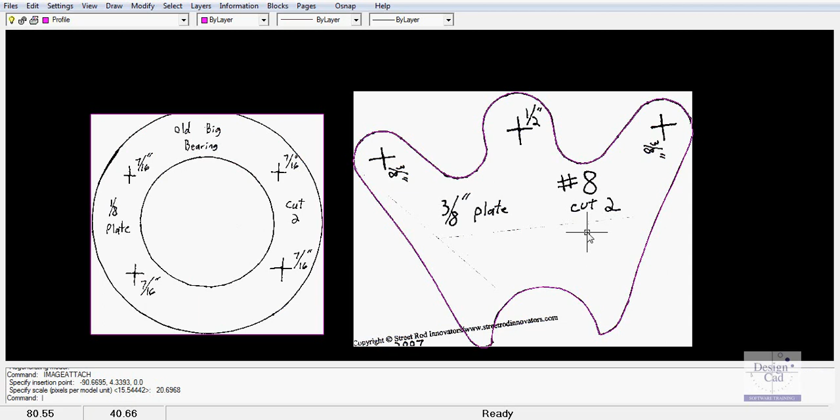You may well want to use the ability of DesignCAD to export DXF files. These could be passed to a laser cutter or a flame cutter, and you might well have some scanned images of the sorts of shapes that you want to draw. The one on the right is quite a complex shape.

What I've done is use the polyline command to trace over the scanned profile there. So if I click on that magenta line, you can see individual little dots as I've traced around the thing.

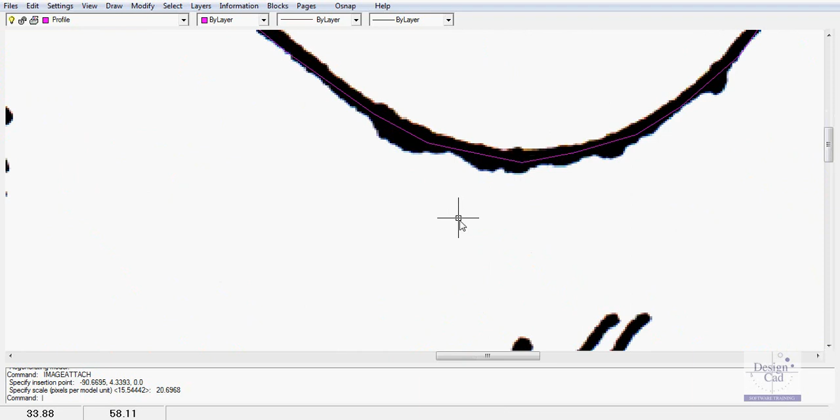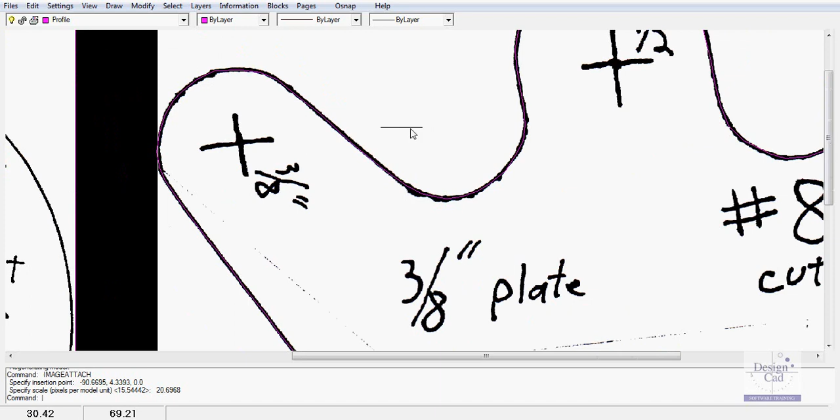You could fine-tune it by just tweaking things, picking on a grip and moving things around. If I put the profile on a layer called Profile, and the image I've been tracing is on layer 0, I can go to Layers and Layer Order, turn off layer 0, and close that little box.

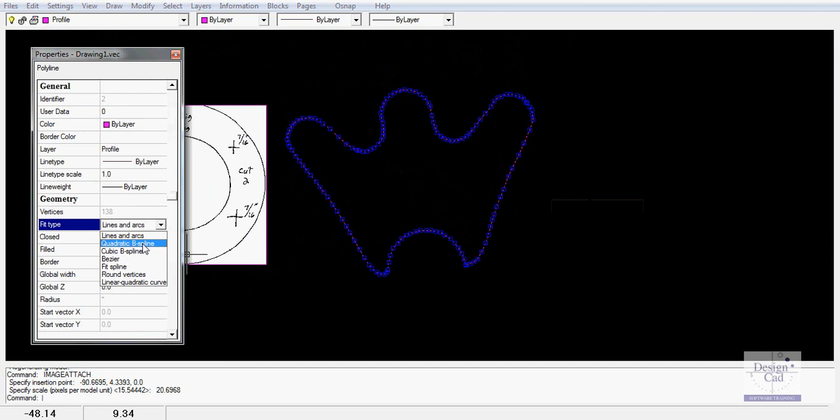Now you can see there's the profile that I've drawn. You might notice it's just a little bit bumpy, which comes from the click, click, click that I was using with the polyline command. But if you select a polyline, it's possible to go to Properties and say, instead of just lines and arcs, smooth everything out.

So we now have a smooth curve running through the shape. If I turn layer 0 back on again, you should find that fits very, very nicely to the base shape. The image on the left here, let's just pick it up and move it a little. We'll move it across here.

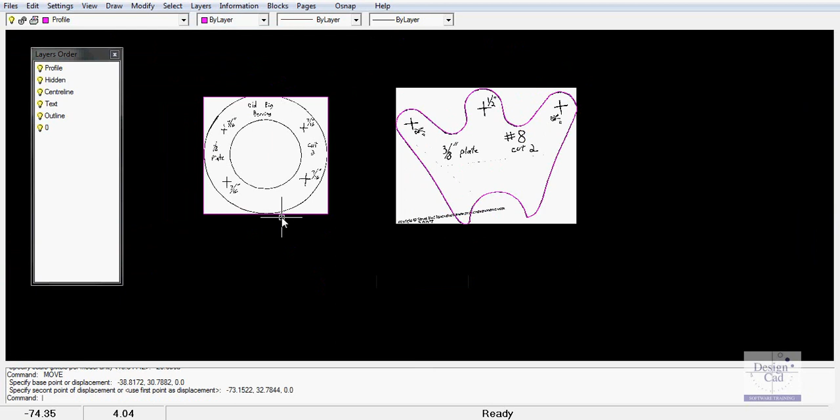The image on the left there, we could do the same thing, but this time we don't need to use a polyline to trace a complex shape. We can just draw a circle, center radius, and pull our circle out like so.

Now, we've not been given any information about the overall dimensions of this shape. We've simply had the scanned image. I'll just check Information Measure. So the distance from there across to there is about 24 millimeters.

All we're told here is that a half-inch hole goes into that point, and half an inch converts to a 12.7 millimeter diameter hole. So let's draw a circle, picking the diameter option. We're asked for the center point of the circle, and now the diameter, which is 12.7, and in it goes.

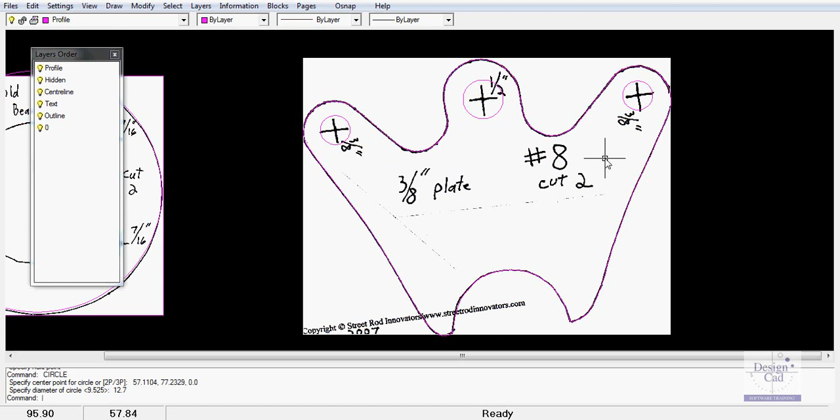So we have a half-inch hole at that point, and a 3/8 inch hole on either side. Let's turn off our layer 0, which will get rid of our scanned image, and there's our shape. I'll get rid of this one now since that's a relatively straightforward one, and right-click and zoom extents.

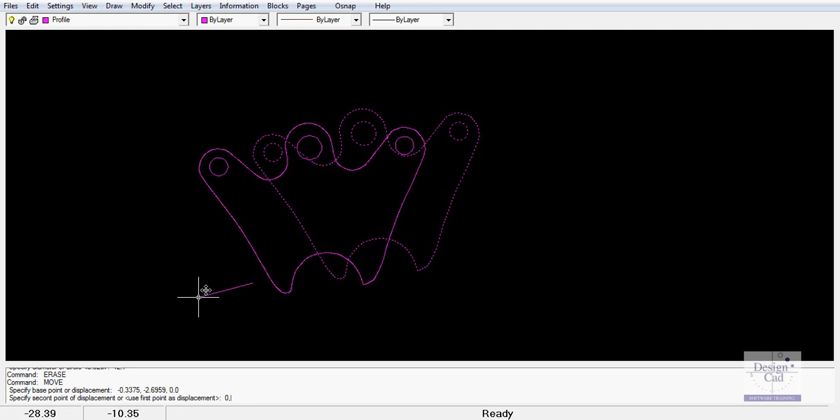So there's our shape. I'd be in the habit of moving this shape and make a point down around here, use that and move it to 0,0. That becomes rather useful for the laser cutter and the flame cutter people.

So now it's a matter of exporting that shape to a DXF file, a drawing exchange file, which can be sent to the flame cutter. It's just a matter of Files and Export DXF, and we'll put it on the desktop and call it Flame.

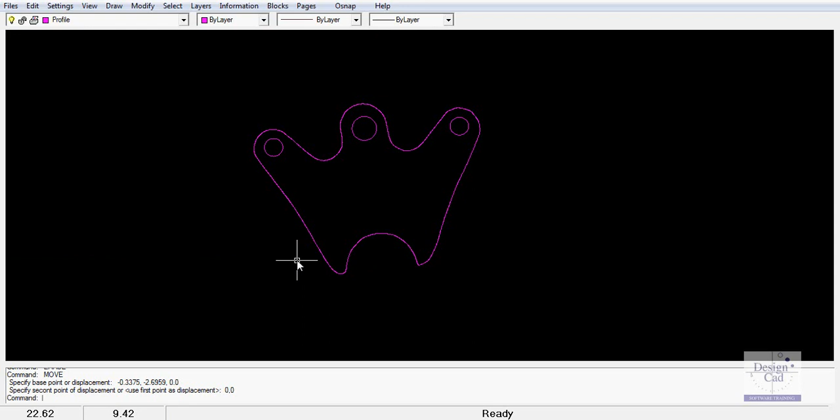And it's going out from the drawing. The drawing's still here, but we have a separate file which is a list of coordinates of that shape, and that can be flame cut. Saves you the job of cutting it yourself.